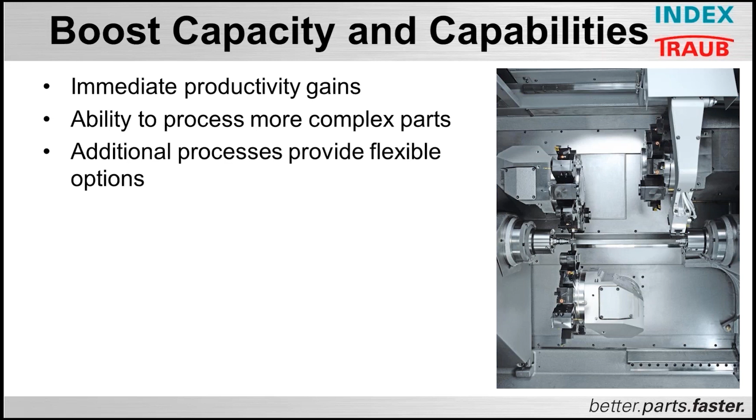So jumping right into it, we want to talk about boosting capacities and capabilities. So we've got immediate productivity gains with a third turret machine, the ability to process more complex parts, and additional processes to provide flexible options. And we'll drill down to each one of these as we move along here.

So getting into immediate productivity gains, we've got more tools in the cut. This is just simple math. If I've got more tools overlapping, I'm going to get a great reduction in cycle time. We have more processing power, not just from a programming standpoint, but from an operator standpoint in the same footprint. The ability to combine operations and avoid moving parts to additional machines for secondary processing.

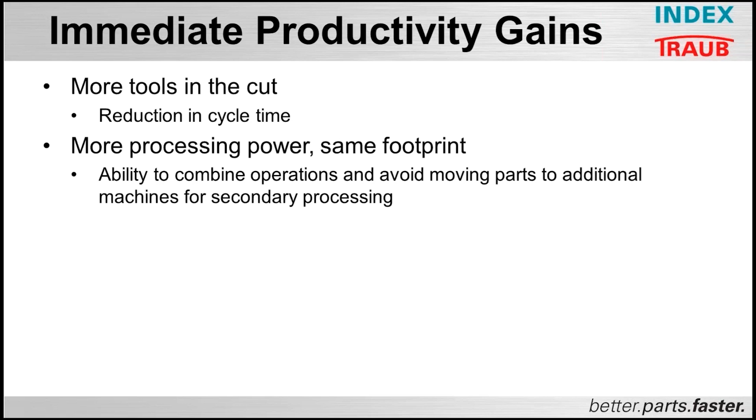We have so many customers that are always in that mode of pulling the part off the machine, moving it to another machine. It always looks good on paper for cycle balance, but at the end of the year, they don't see the monetary gains from doing it that way.

So more tools in the cut. A third turret instantly gives you the ability to have 3 tools in the cut. When an application is optimized to take advantage, the result is a dramatic reduction to cycle time. It's like we said, simple math. I've got more tools overlapping at any given time.

More space efficiency. So a third turret essentially adds 50% more machine with no change to the floor space requirements. We all know that square footage is at a premium these days, and it's not just from the building standpoint. As we add any type of machinery, we're adding people to maintain that machinery, heat in the building, lights, and all the rest that adds to the overhead of any part that you're creating on that machine. So if we can increase 50% of that machine in the same amount of floor space, we're money ahead on every part that comes off that machine.

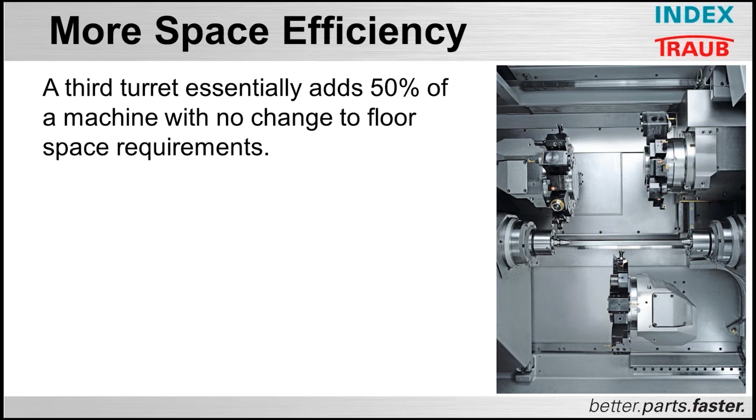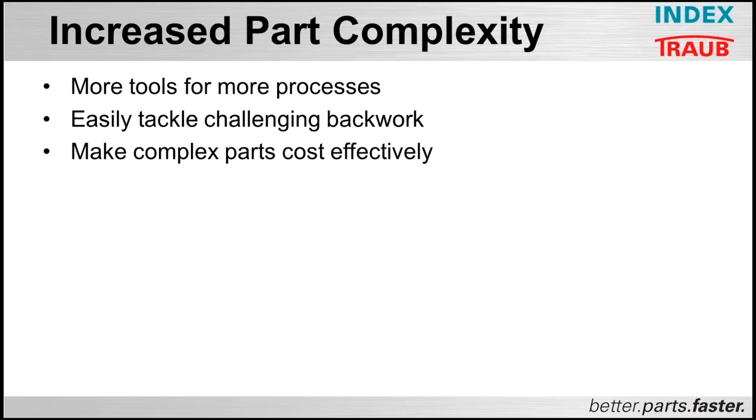Increased part complexity. So we have the ability to have more tools for more processes, easily tackle challenging backworking. We know that parts typically are backworking heavy, and we can make more complex parts cost effectively. So we can take a look at these and drill down a bit more. So higher tool capacity by increasing the tools available by 50%, it allows you to process

significantly more complex parts. More effective application of standard tooling minimizes or eliminates the need for custom tools, i.e. if I'm having to use a lot of form tools because I don't have a lot of positions left on my turret, this will allow me to put in a center drill and have multiple drills utilizing that same center drill. And it's going to keep the cost down and not have to buy customized tooling.

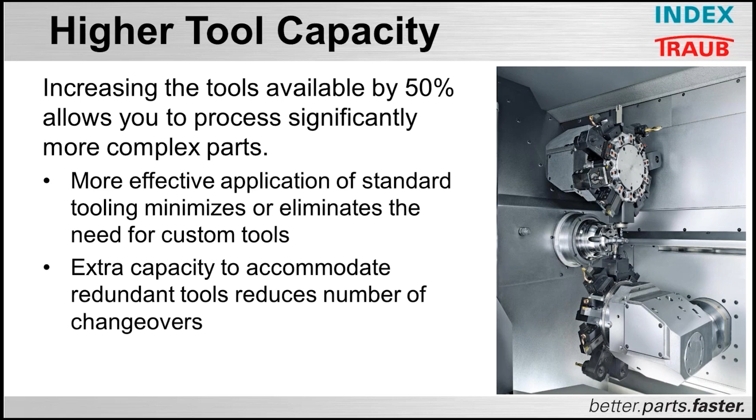Extra capacity to accommodate redundant tools reduces the number of changeovers. If I've got more resident tooling that I can leave in that machine, I can easily go up and co-utilize that tooling for a different part and not have to have an extensive changeover.

Complicated backworking. With the ability to serve either spindle, a third turret allows more efficient cutting of complex features on the back end of the part and allows the programmer to choose to work front to back or back to front.

We all know that one of the first things that we do when we're trying to process a part is we're going to look at that part and figure out which way we're going to attack it from. I can be severely limited with just a single or a dual turret machine in how I'm going to attack that part. By having the third turret, being able to do more complex backworking or a lot more backworking is going to allow me to make better choices or have greater versatility in moving that part around.

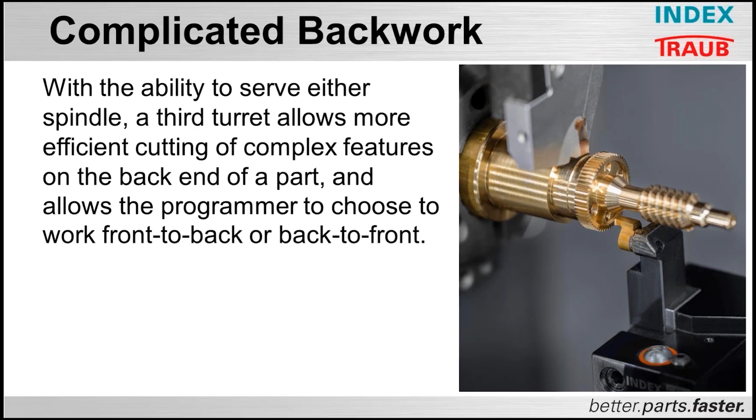Cost effectiveness. A third turret provides programmers the ability to balance operations for a much wider range of parts, allowing for much greater machine efficiency, spindle utilization, as well as empowering you to bid on and win more complex work.

One of the things we're always battling is the status quo. If I can bid on more complex work because I have more processing power in that platform, it's going to allow me to bid on higher margin work and have greater profitability and be more competitive than the next guy down the street.

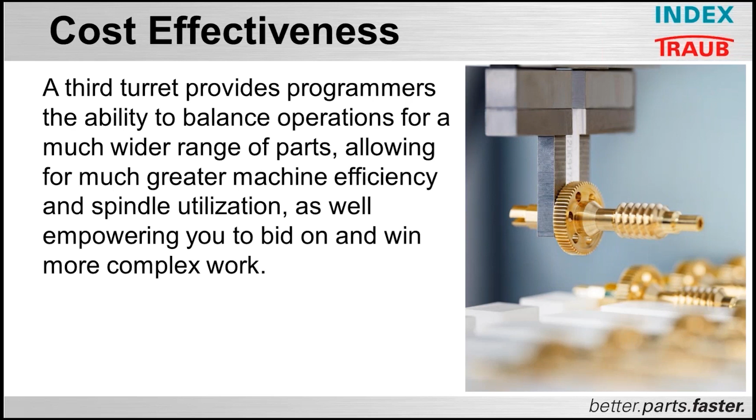So that brings us to additional processes. Some of the additional processes that a third turret provides us is the ability to do pinch turning, using two turning tools at the same time, pinch milling using two milling tools at the same time, dual process drilling, which we'll define a little bit more in a minute, flexible part support options, and the power of dual spindles. It's the last thing that we want to talk about in this.

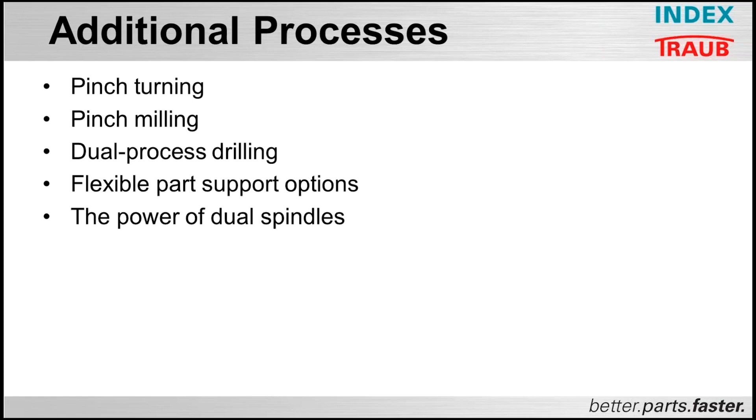So pinch turning. Pinch turning is applying tools in opposing directions that stabilize the part by balancing out those cutting forces. We can also rough and finish at the same time in a single pass, or maybe I'm taking multiple roughing passes. I could have two roughing tools at the same time, extending my tool life because I'm breaking that up over two tools, but also I'm whittling that part down a lot faster.

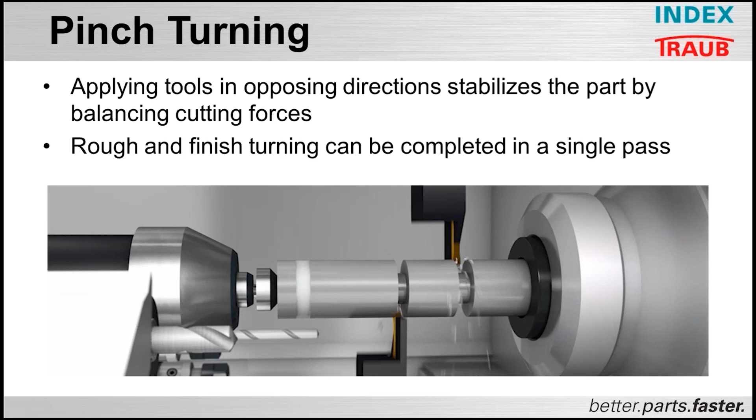We've got a quick video here, or animation, that we're going to show you in this pinch turning. Hopefully it will boot up quickly and the technology gods will be kind.

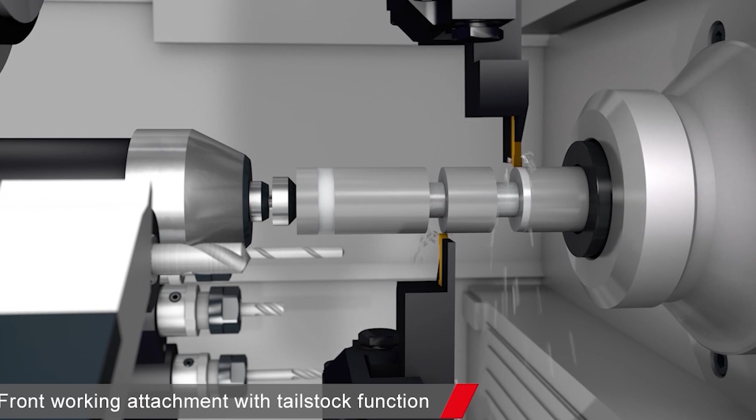So this is a simple pinch turning animation. As you can see, we are plunge turning with these grooving tools. And as you can see, opposing forces are helping to balance out and stabilize that cut.

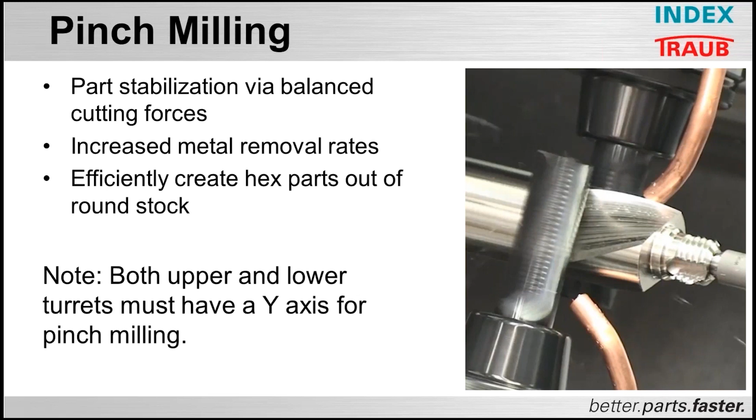Pinch milling. Getting into pinch milling, part stabilization, once again, via balanced cutting forces. Increased metal removal rates by the ability to put two roughing tools in here; machining off material allows me to quickly whittle down a part. And we can efficiently create hex parts out of round stock.

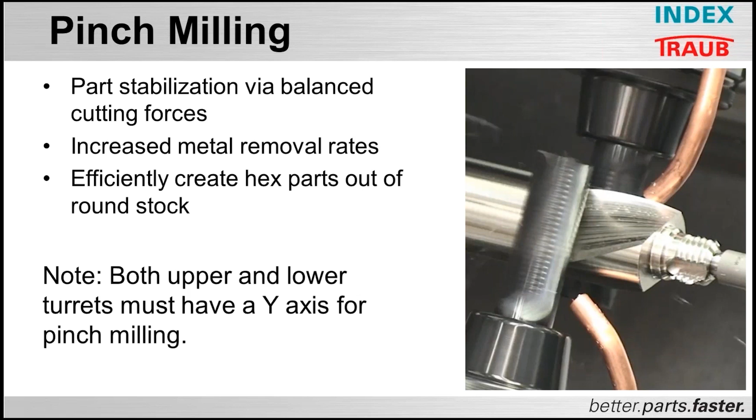We've got so many customers that are trying to process something faster by putting in expensive hexagonal stock only to machine away almost all of the hexagon to leave just a small area or a flange with wrench flats in it. Now note, it's really important to have both an upper and lower Y-axis turret for doing this pinch milling.

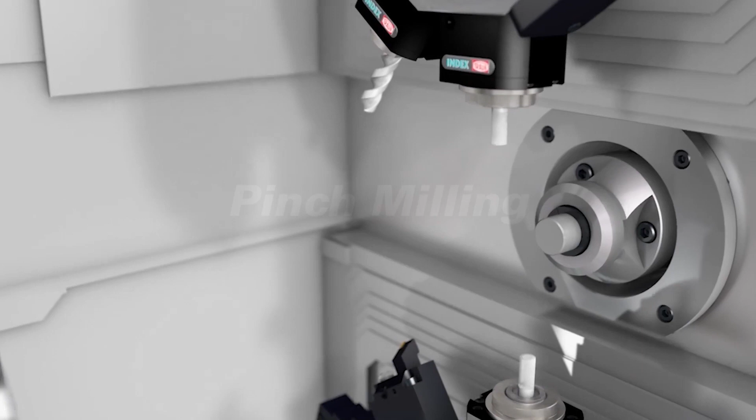We've got another little video that will queue up here for you that has animation as well as a real-world part that we created on one of our C machines that will show the benefits of those cutting forces. So at first, as you can see here, we've got an animation. We're putting some flats in here. Once again, you can see we've got opposing cutting forces. We're going to drill through that flat.

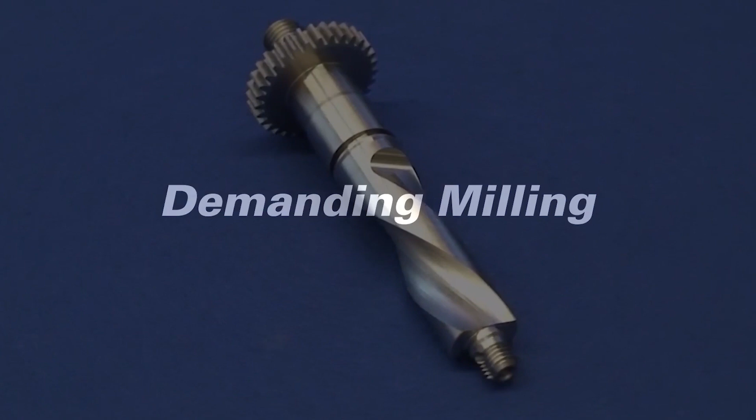Now, this next part is a real-world part where we were doing a little over half-inch roughing end mills, both cutting at the same time 180 degrees apart. And because we balanced out those cutting forces, it's allowing us to take that C-axis and twist that part and cut those two flutes in that part.

Simultaneous drilling. So simultaneous drilling, part stabilization by balanced cutting forces, once again, highly efficient for multi-hole parts. Now, most of them are going to be 180 degrees apart, but I could have multiple rows in those parts as well. Simplifies deburring operations. I could be using one drill to deburr while I'm drilling with another.

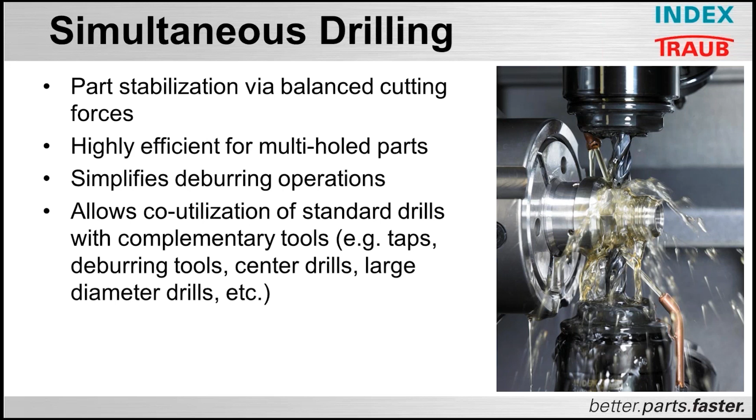Also, the co-utilization of standard drills with complementary tools, such as taps, deburring tools, center drills, and large diameter drills. Got a little animation here too for the drilling.

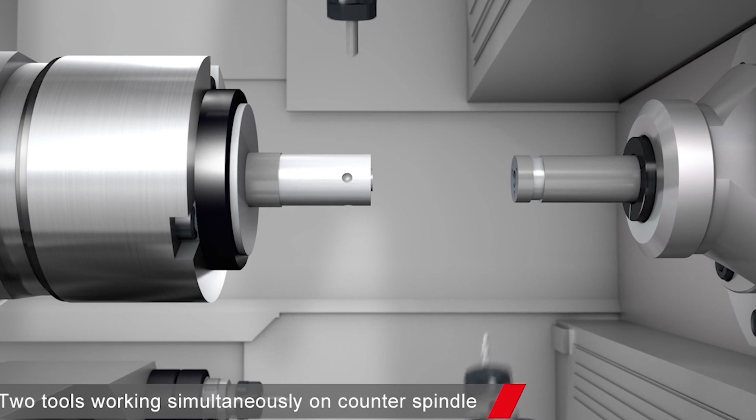As you can see, once again, opposing forces. So we're going to be able to go in and drill into this part efficiently, minimal part deflection, and very quickly make 4 holes in the part.

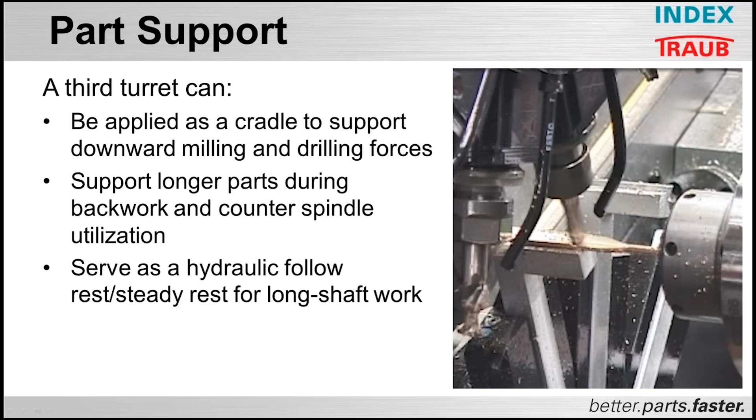And lastly, part support. A third turret can be applied as a cradle to support downward milling and drilling forces or side milling forces. We can support longer parts during back work and counter spindle utilization. So if I had a long shaft that had very little back working on the end, I could have that swallowed in the counter spindle while I have the main shaft now sticking out of the main.

I can use that lower turret to help support that, i.e. either with a cradle, or it can serve as a hydraulic follow or steady rest for that long shaft work to aid us in supporting that part.

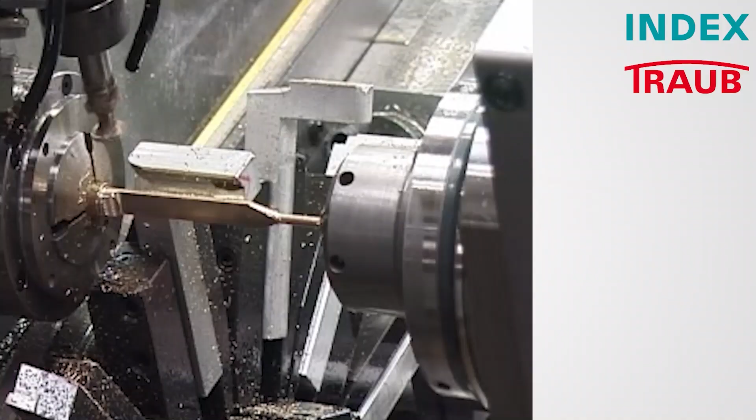We've got a real-time video that you'll see here of us making a bone plate, bone screw. Take you through it. As you can see, we have that cradle come up, and we are helping to support the side loading forces as we rough off a flat in that. You can also see in the background, we've got several of those cradles all queued up in that turret to come in and support that part

differently. In this particular case, now it's supporting it vertically, so I can go in and dish out the convex area for that bone screw plate. I think everybody can get the idea on this one, so we're going to jump out of that video. It's a little long-winded.

And lastly, what I'd like to talk about is dual spindles. So dual spindles, a machine with a third turret will frequently include dual spindles instead of a main spindle and a sub spindle. This allows any work to be completed on either spindle, offering further flexibility to your programmers and your operators. If I've got a sub spindle that has smaller bearing design or less horsepower or less torque, I don't have the ability to take the same cuts on the backside as I'm taking on the front side.

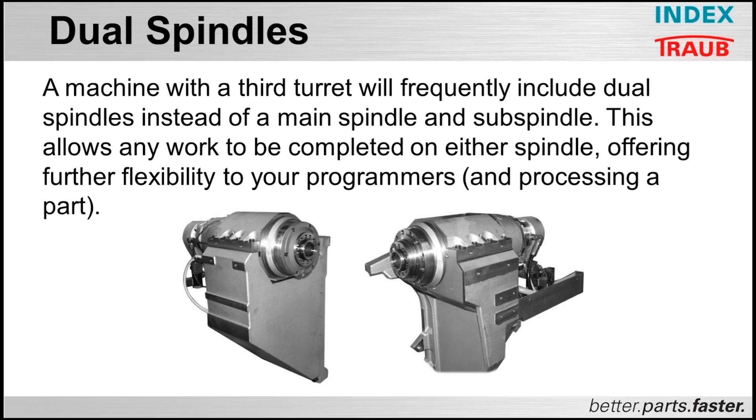You know, the material doesn't change, the feeds and speeds don't change, but the machine's capabilities do. So if I've got a diminished counter spindle to do my back working, it seriously starts to negate the benefits that we talked about with a third turret.

So, in summary, the benefits of a third turret: we've got immediate productivity gains, the ability to process more complex parts, and additional processes to provide flexible options. That concludes the industry perspective.

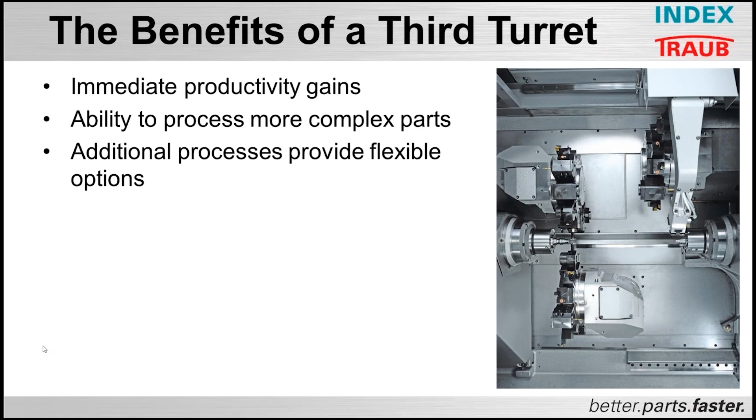What I'd like to do now is turn it over to Mr. Mike Huggett, that's going to give you the Index perspective as to why we think the C-Series best utilizes all of these benefits of a third turret. So with that, I'll turn it over to Mike.

My name is Mike Huggett. I'm the National Sales Manager here at Index Corporation. I cover North America and Canada with our sales team. And I'm going to do a brief infomercial on the Index C-Series machine tool and the advantages Index has over its competition.

Can you hear me now? Yep, we can hear you, Mike.

Okay, great. The main advantages of the C-Series, when we're talking about it, is accuracy. And its accuracy is achieved through its stable design and almost zero thermal growth. Its strength, having powerful motors both in the driven tools and in the spindles, and box ways for added rigidity.

Its speed and acceleration, both in the main spindles and driven tools, but also in the non-cutting times, the ability to go from 0 to 1G acceleration in less than 20 millimeters. And then versatility, allowing you to have rapid changeover and go from there.

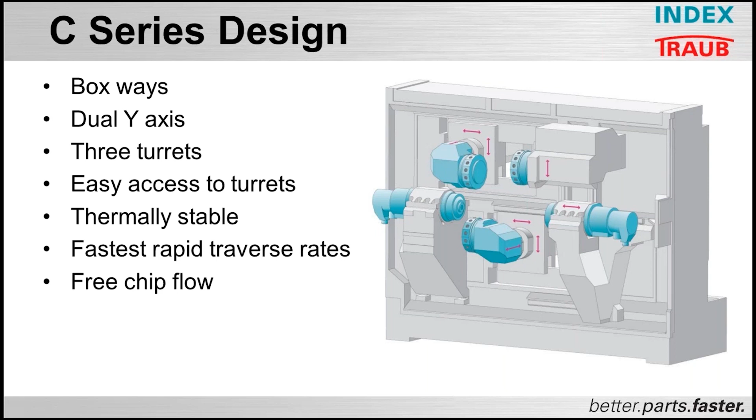So the turrets themselves are on an innovative plate guideway system. So you have two box ways, both on the top and the bottom of each of those turrets. The turrets are directly inside the machine bed, so there's no stack up of tolerances. If you've ever taken a look at a slant bed lathe, you have a turret on top of another wedge, and those two wedges move to give you your Y-axis movement, but there's huge amounts of mass and weight. So you're constantly fighting slip-stick and movement on those areas, whereas ours is a very minimal overhang to the center line of that turret, allowing for maximum rigidity.

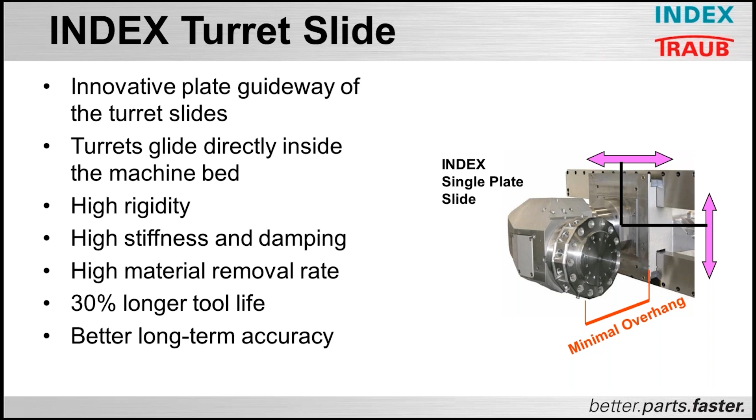Also, because it is box way, you have the advantages of the dampening of those box ways, which give you higher metal removal rates and up to 30% longer tool life for better long-term accuracy. The turret movement itself is 100% unique to our industry. It uses a kinematic series of levers that are backed up by linear scales to measure the distance between the slides and counterbalanced with the coil spring. This effectively gives us minimal thermal growth with 100% compensation for glass scale measurement.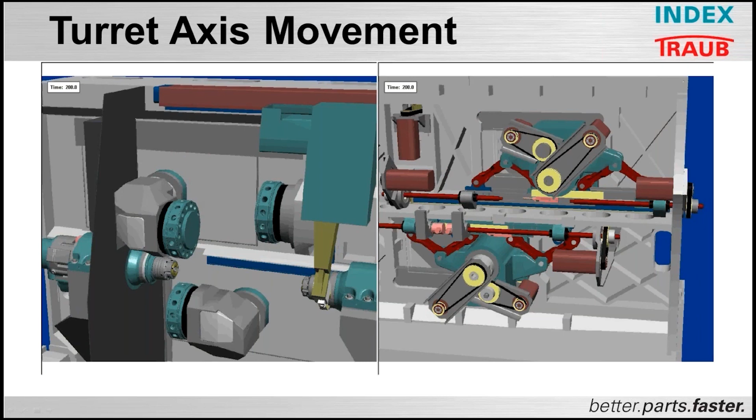Extended tool life. Index single slides are double dampening quality because we're combining both sides of that box way. So we're not just pushing on the top of the box, we're sandwiched in between it, which allows us to have almost 30% longer tool life and better surface finishes. Whenever you're using a roller guide system, that roller guide will pick up vibration and will sound like a tuning fork and transmit that throughout the casting. By using a box way and by sandwiching those ways in between it, we eliminate up to 30% of that vibration, which allows us to have a longer tool life.

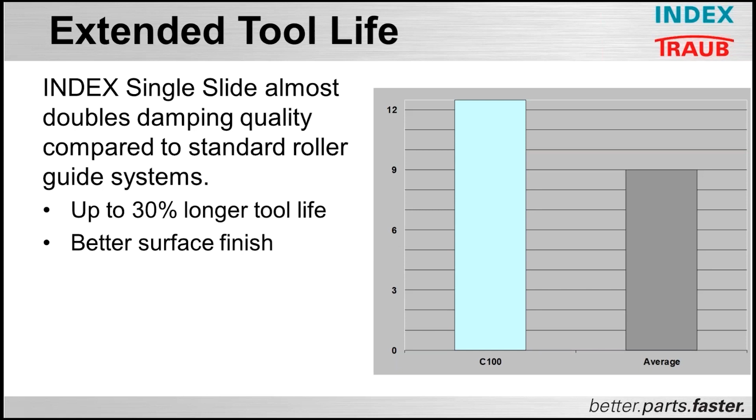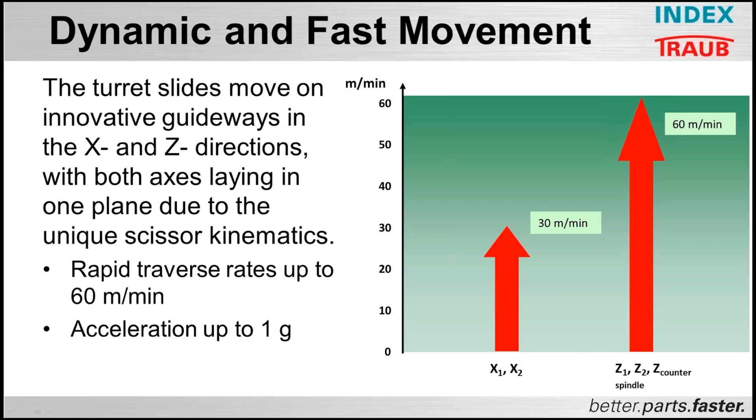Dynamic and fast movement. The turret slides allow us to have extremely fast acceleration, almost 60 meters a minute in our rapid traverse plane, with 1G acceleration achieved in 20 millimeters of stroke. If you've ever watched a turret move, you have to get out of the way due to different tool lengths and interference points. So you finish a cut, you move out of position, you rotate the turret, you move back into position. When we can do that at a 60 meter per minute rate with 1G acceleration, it's lightning fast, which allows us to be extremely fast in our non-cutting times.

Now, when we talk about the three turrets, we do have two Y-axes that can be applied simultaneously at the main spindle or at the rear spindle to optimize your machine balance. Our Y-axes have over 70 millimeters of travel, which helps to reduce cycle time, allows for simultaneous turning and milling, and then simultaneous cutting on that second spindle, all the things that Craig highlighted in his presentation previously.

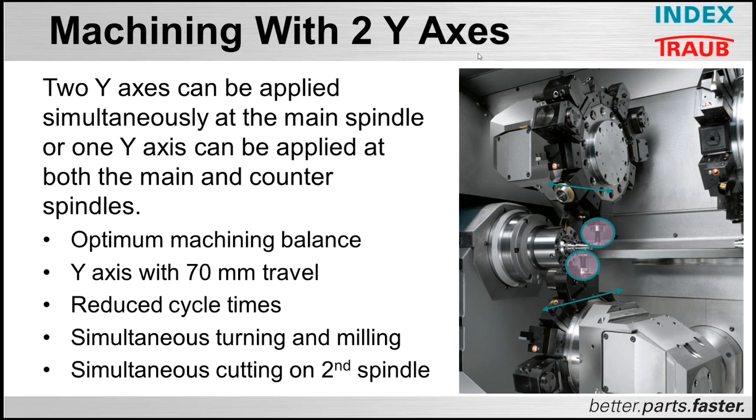The main and sub spindle are perfectly balanced to allow for highly powerful and productive acceleration and deceleration. They are liquid cooled, built by us for us in our factory, where we even do the windings themselves in these spindles. So you can go from 0 to full RPM back to full RPM the opposite direction in less than a second, and we're able to synchronize our C-axis at full RPM. Literally no delay. If you've ever watched a cutoff cycle on a Fanuc machine, it can take up to 8 seconds before you even engage your cutoff tool. We're doing it almost instantaneously.

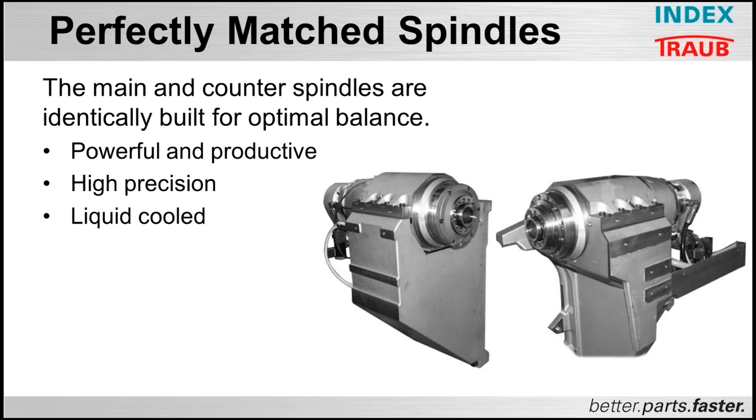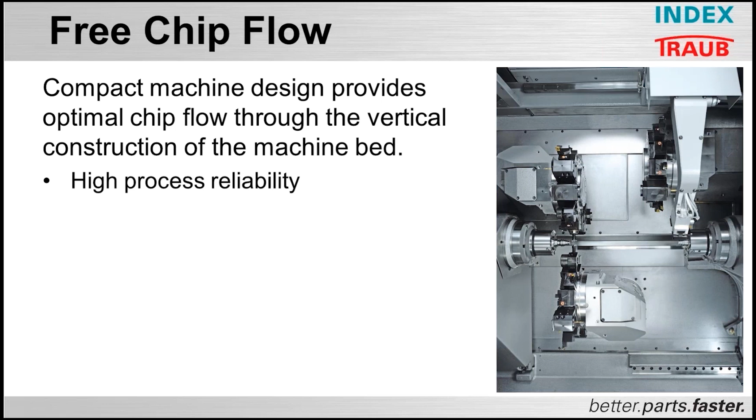Free chip flow. I love this picture because it lets you see how easily the chips get out of the way of the machining environment. It allows them to pass vertically, just like on a horizontal machining center. And you can also see we have no accordion way covers up above. They're all flat way covers, which helps to eliminate any contamination getting up and over and behind those covers themselves. So it gives you an extremely high process reliability without having to worry about chip buildup on non-cutting areas.

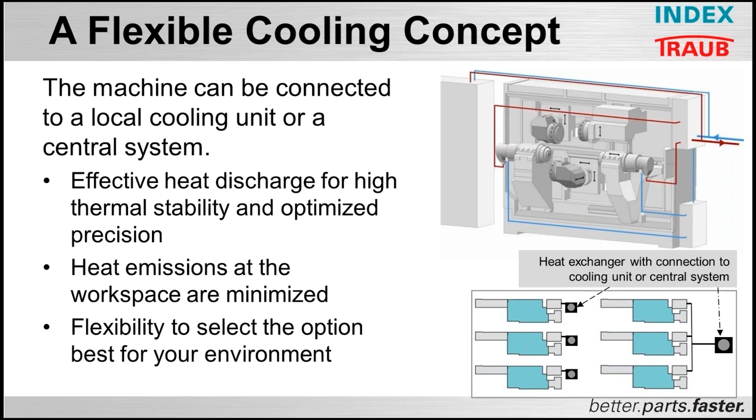Flexible cooling concept. We chill our spindles, we chill our hydraulic units, and we chill our control cabinets, all to make sure that we're extremely thermally controlled for optimized precision. You do have the ability, when you buy more machines, to put a heat exchanger in and run multiple machines off that central unit. Northern customers like that option because now they can use that for heating in the winter and not put additional heat into their building in the summer. So it's both flexible and optional for the environment.

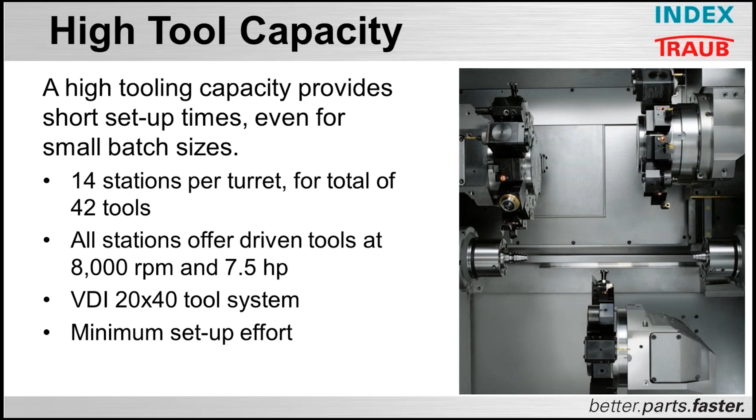So what we're talking about when we do that is our patented W serration system built directly into our turrets. It uses hardened ground grooves for fast and accurate tool changes. Holders can be locked in place with a single screw, and the W serrations lock them into position for maximum torque. You actually have almost 3 to 4 times the torque on the W serration than you do in a standard bolt-on turret that's on most machines today, a BMT or a Mori style turret.

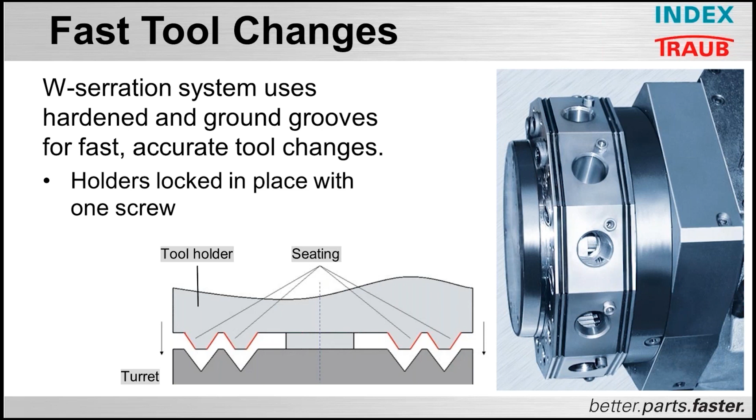The beauty is that you can take a tool holder off, put it on the shelf, and put it back in that machine 3 hours from now, 3 days from now, 3 years from now, and it'll repeat to plus or minus 2 microns, perpendicular and parallelism. So you're no longer tramming in your tool on your machine. You're setting your offsets offline, dropping that mechanically back into that W serration, and knowing you have maximum rigidity and repeatability.

We use an integrated part unloading arm. We're not going to shoot a part into a basket and mar it up. You have the ability to pick up from the main or the counter spindle. It's picked up with a robot arm and loaded onto a conveyor and pulled softly outside the machine work environment, maintaining your part's accuracy and beauty.

You have awesome service access on these machines. One of the nice things that the C machine is an innovator with is it moves the control cabinet off from behind the casting. It puts it in parallel with the bar feeder. What that allows is you have full access to the back of the machine as a maintenance department. But the nice thing is none of that heat from that control cabinet is affecting the back or the casting of your machine tool. So we're 100% removing another interference point or point for thermal instability by moving that parallel to the bar feeder.

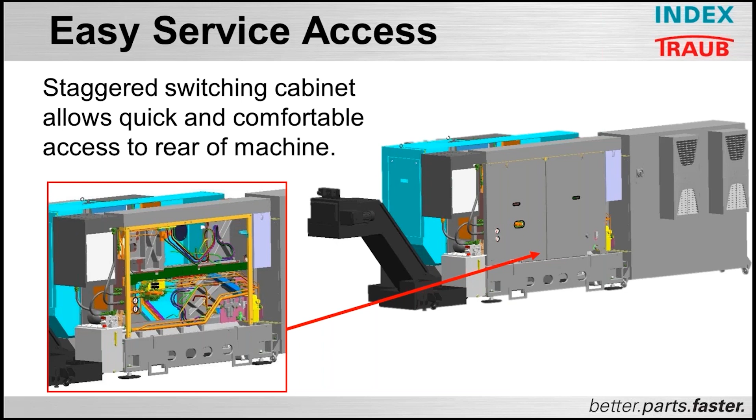Small footprint. By offering higher performance with less floor space, we make optimal use of your valuable production space. Our competitors can put 3 machines in the space that we can put 4. Very thin and compact, allowing us to have full access and easy operation.

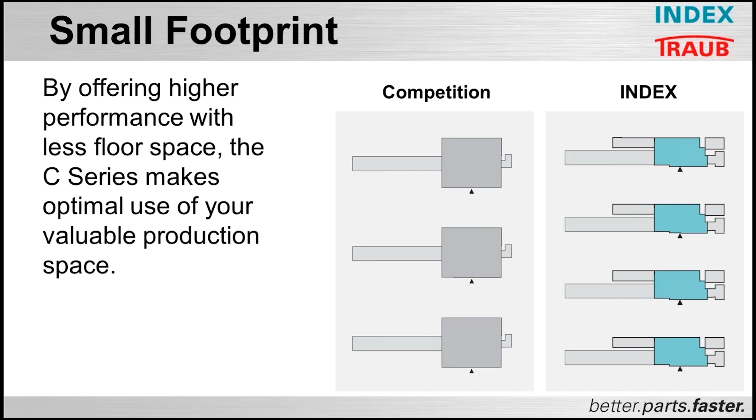So in summary, the C-Series advantages are 3 tools in the cut for the lowest cost per piece, flexible design for diverse applications, fastest kinematics for maximum output, and compact design for maximum floor space effectiveness.

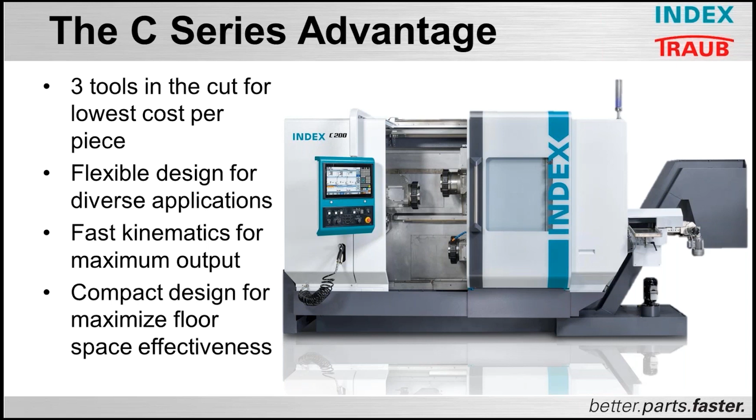So what I'd like to do is give you a simple real-world example of a shop floor part process and how using a 3-turret index machine can be more cost-effective and make you more profits. So let's assume you get a contract that's for 91,000 pieces. So that equates to 1,750 parts per week over 52 weeks. Let's assume that you're able to operate 24 hours a day, 7 days a week at 80% utilization, which equates to about 134 hours per week.

Now I'm going to establish a shop rate of only $30 an hour. I hope most of you have a higher shop rate than that, but in today's times, we don't know what we need to do to keep busy. So we're going to keep this at a $30 an hour shop rate.

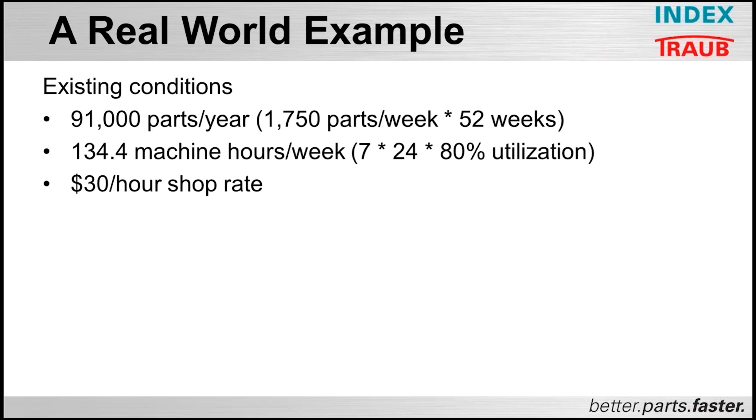We're going to assume that your old process is a standard 2-turret main counter spindle lathe versus ours, which would be a C200. The cycle time under your old process is 270 seconds. And to make 1,750 parts per week, you're going to require 131 hours to run that. Your shop rate of $30 an hour times 131 hours is almost $4,000, $3,937. Divide that out by your number of good parts, 1,750. That means your shop rate is effectively $2.25 per part.

Let's do that the opposite way. If the index cycle time is 92 seconds, we only require 44 hours to run that same part. And your shop rate at $30 an hour, your shop rate is only 77 cents per part.

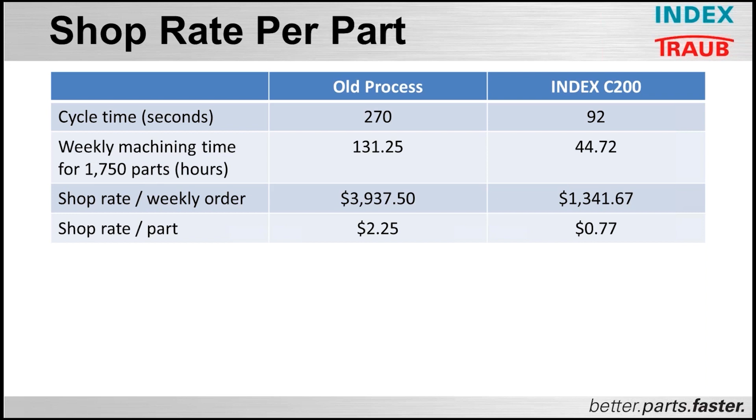Okay? Now, what about the cost differential between the old 2-turret machine and the new Index 3-turret? Well, the old process, the machine cost is $350,000. You've allocated 97% of that machine to make 1,750 parts per week. So your annual part production capacity is 93,000 parts. So you divide 93,000 into 350,000, that's $3.76 per part to pay off that machine in 1 year.

If you take a look at the Index side of things, our cost is $685,000, but we're only utilizing 33% of that machine. If I go to the same 97% rate, I can make 273,000 parts in a year, paying that same machine off in a year, doing over 3 times the capacity. My part per machine cost is only $2.50.

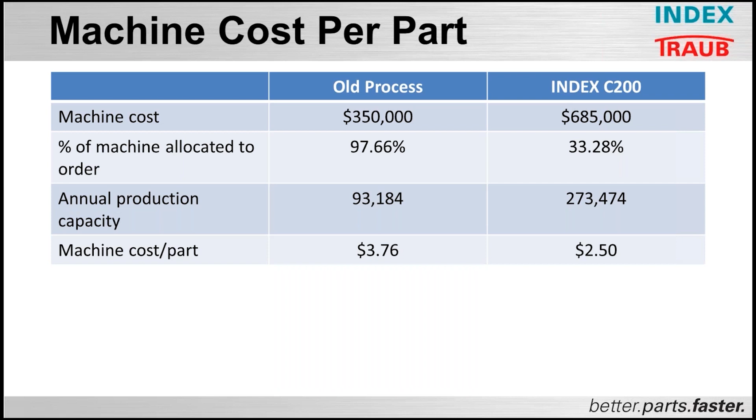So now look at them side by side. Your shop rate goes from $2.25 to 77 cents. Your cost per part drops from $3.76 to $2.50. Your total cost per part, shop rate and machine cost, goes from $6 to $3.27, almost half the cost. In addition to a lower cost per part, the C200 has almost 300% of the capacity of your previous machine while taking up less floor space.

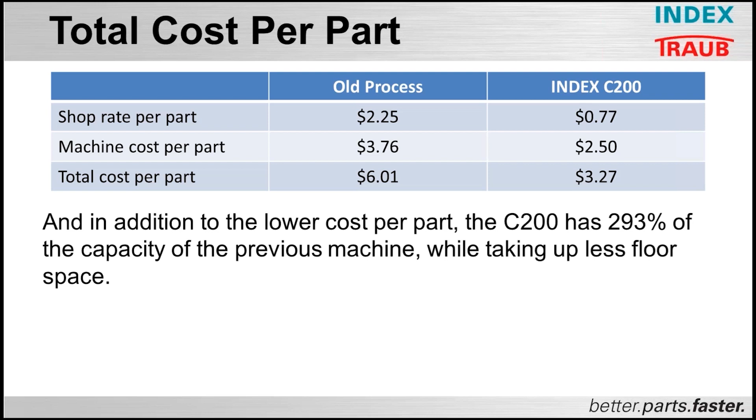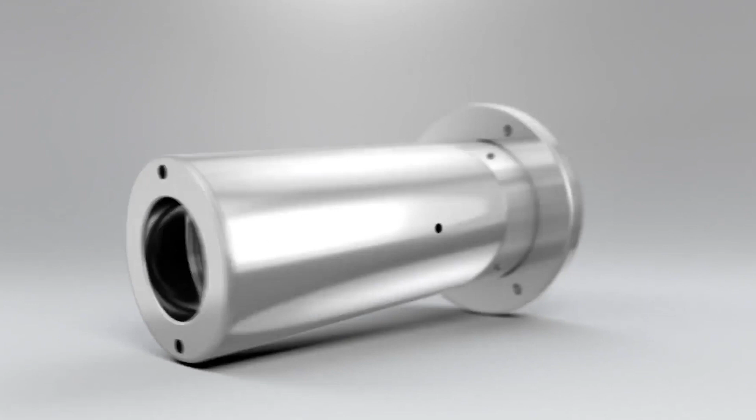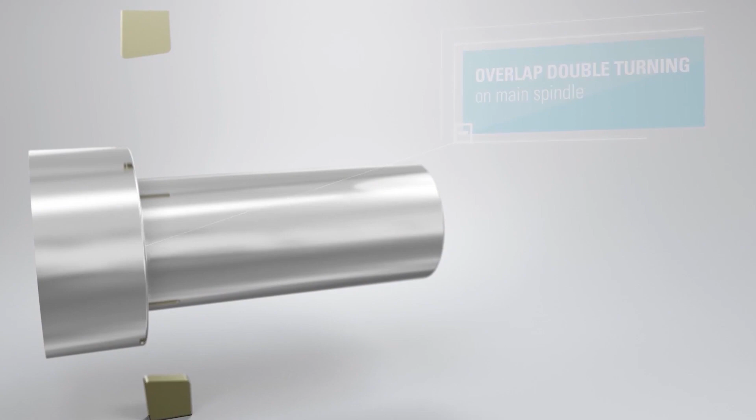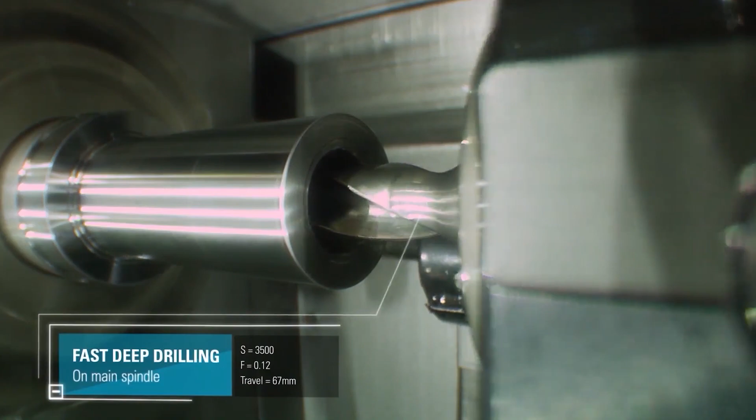I'm going to show a video of a real-world example of this. This is an aerospace part that was made on a conventional 2-turret machine, 42 millimeter bar, and the competitor quoted 274 seconds. We were a lot faster. Now in this video, you get to see a lot of the things that Craig talked about. Overlap turning, pinch turning, roughing and finishing through one pass, utilizing 2 turrets. Simultaneous use of the counter spindle with the other turret.

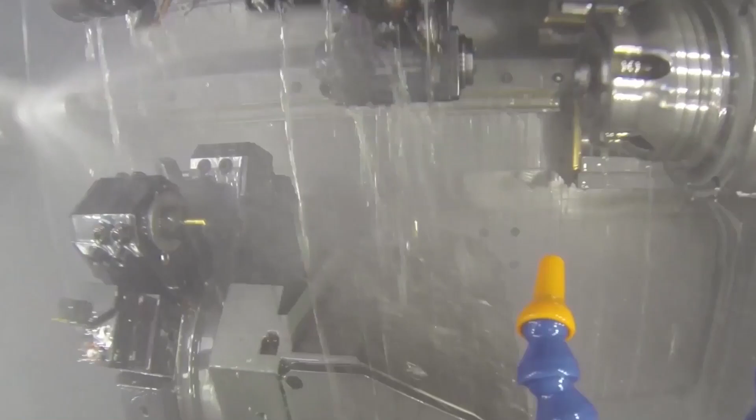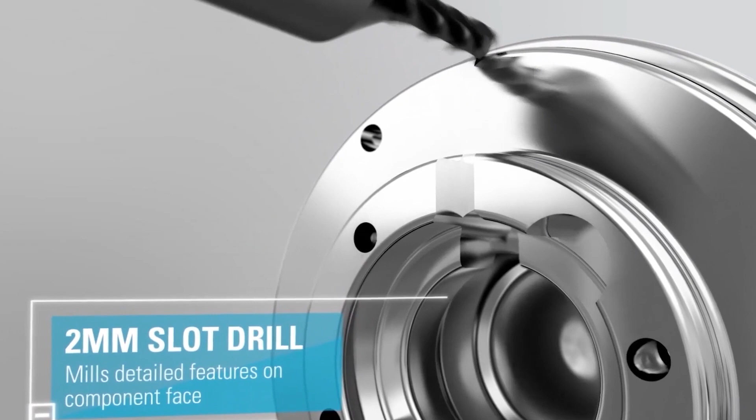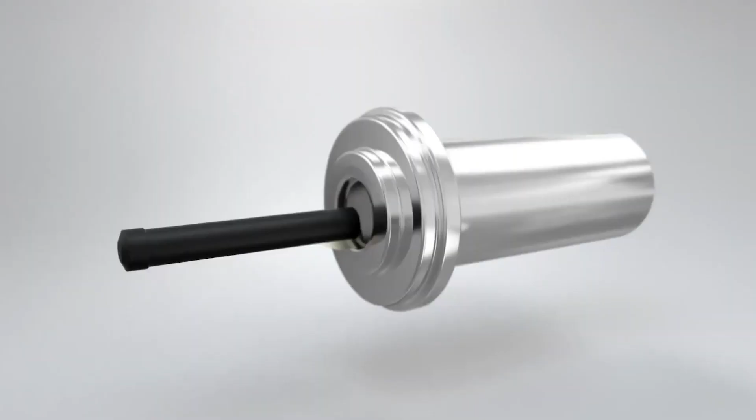1,000 PSI on any tool at any station. Y-axis off-center drilling and tapping. Z-axis positioning. Watch how fast this is. Can't even see it. Utilizing those 3 turrets to work on many different positions of the part at the same time. Driven tool capacity, all turrets at any position is driven.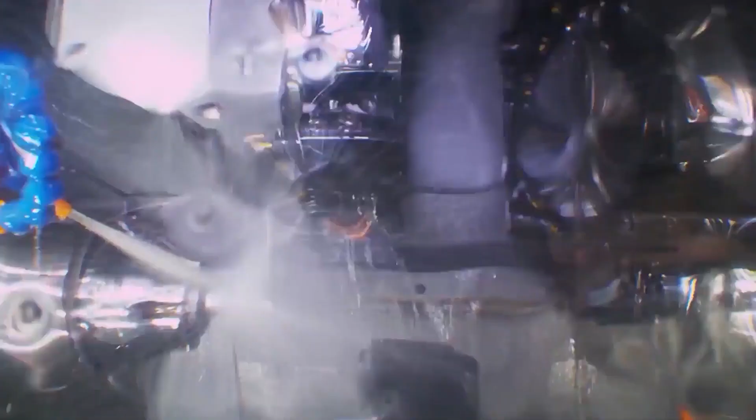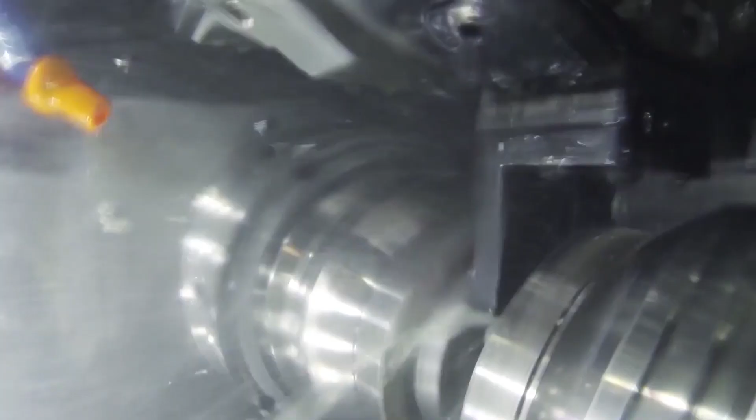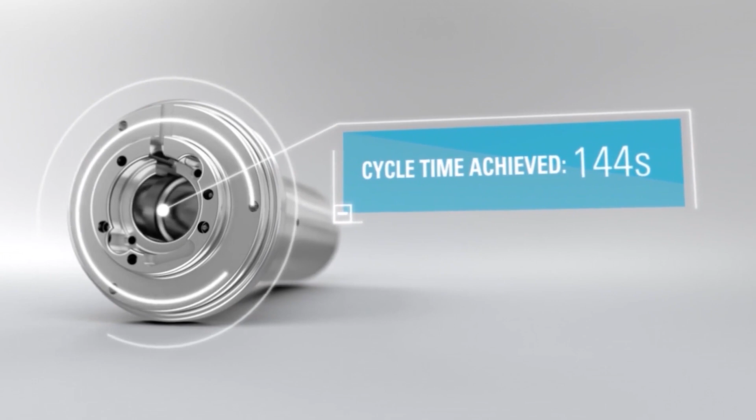And all of those thermally stable processes allow you to hold extremely tight CPKs on critical dimensions with amazing finish and tool life due to the box ways. Rigid tapping, every position. And there's the unloader. There's the transfer and the cutoff. So when we look at the cycle time comparison, they were 274 seconds. We were 144, almost 130 seconds faster.